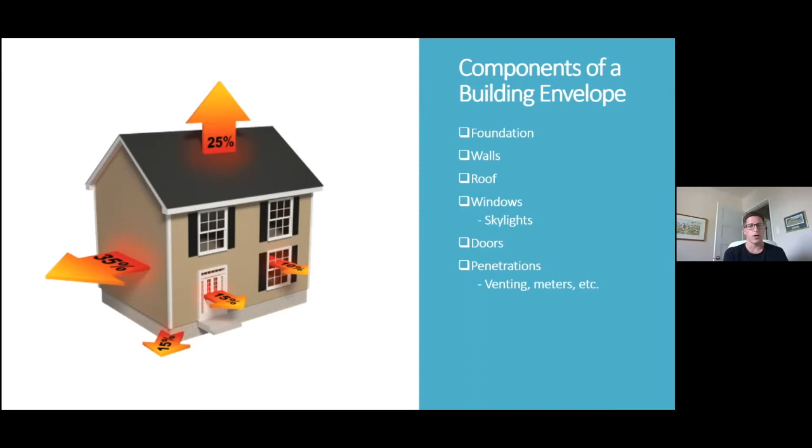This is simply put, but for the most part, envelopes fail for one or a combination of four reasons. The first would be design deficiencies. Like I was saying, if you design the wrong type of wall assembly for your climate, that's going to be a really quick way to see failure. So in Edmonton, if my wall is not designed with enough insulation, my envelope is just not going to be adequate, so it will fail.

Material failure. You can get failing material. You can get shingles that shouldn't have made their way off the line. You can get poor cladding. More often you'll see material failure with windows and whatnot. So that's a possibility. Poor workmanship. So things not being installed properly. You can buy the nicest window in the world, but if you just slap it in, the gaps aren't sealed and it's not a flush install, that window will basically operate just like a poor window.

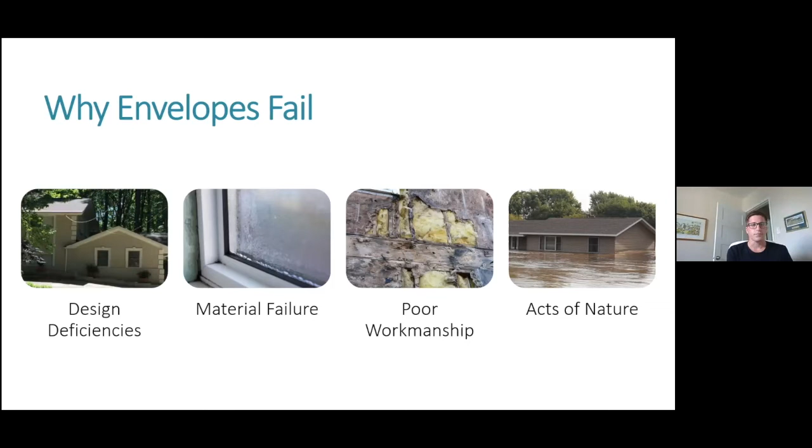Okay, getting into the individual components of a home. Starting at the bottom of the building is the foundation. The foundation is the load bearing part of the building, which is either below or sitting on the ground level. There are three major types of foundation found in residential homes: basement, slab on grade, and crawl space. Each has its pros and cons. So I'll briefly touch on each of them and what some of their features are.

With the basement foundation, I don't think I need to really go into what that is, but obviously an underground place to live and play, 6 to 10 feet deep depending on soil conditions, typically provides the most load bearing.

Excuse me, just want to make sure that I'm, okay, yeah.

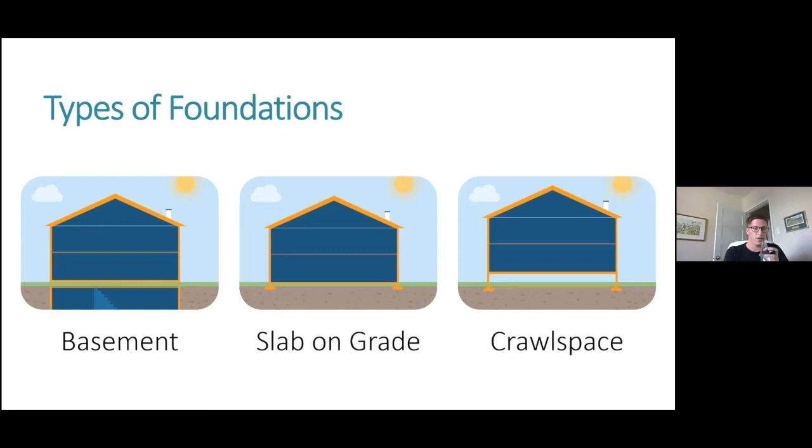Okay, so in terms of foundation failures and fixes, I'll just breeze through this. Typical failures we find: flooding, mold, housing collapse in the worst scenarios, cold basement floors, and air leakage. So those are some of the most common failures with various degrees of severity. And simply put, there are some fixes that we can consider in our housing group. So adding gutter extensions, plugging gaps, restoring crown, reshaping landscaping. So that's a pretty simple one.

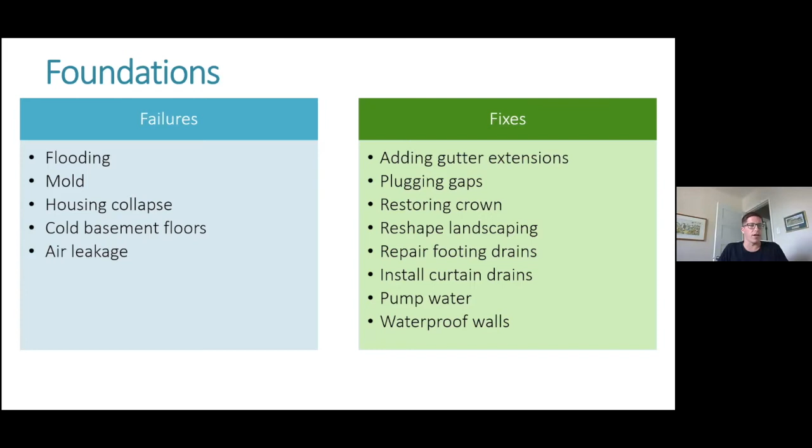Often you'll see people having their eaves troughs towards the ground, and then the ground is really close to a window or their foundation. So just trying to avoid those little things to make sure that, as your house is filtering out rain, it's going away from the home and then maybe going down in a down slope. So gravity will work its way away from the home, as long as your neighbors aren't too close to you, obviously. And then, installing curtain drains, pumping water away from areas, and then installing waterproof walls are some simple fixes.

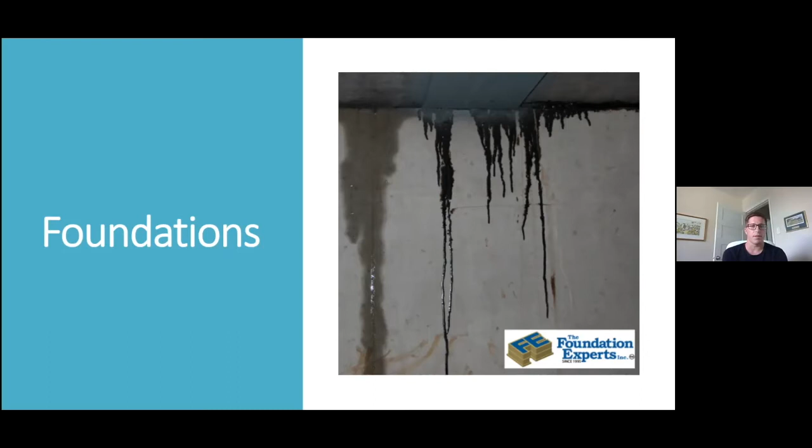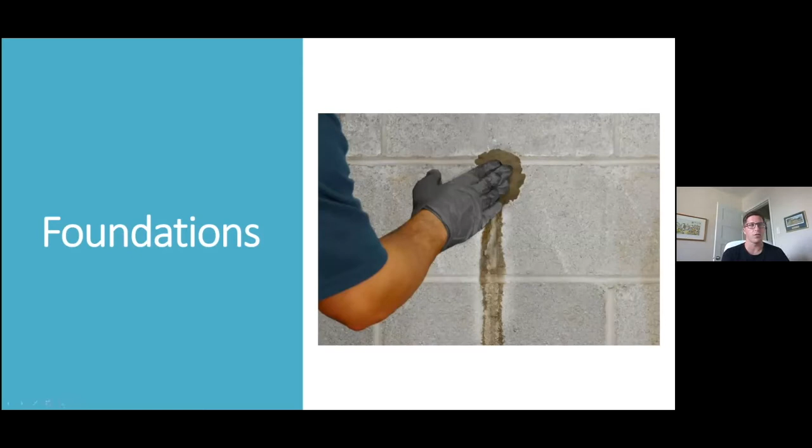And then, there may be quick fixes that you can do as a housing manager, as a maintenance individual, but you may sometimes have to pay a professional. So just something to keep in mind here. That's just a little image. And then this is an installer fixing a crack in the foundation with some hydraulic cement. So this is a simple fix to a leak in the foundation. It's not going to necessarily repair the building entirely, but you can make little patches like that and help out quite a bit and go a long way.

So in terms of waterproofing basements and crawl spaces, this is just quick do's and don'ts. You're going to want to find the source of moisture. So that's a do. Fill cracks in the foundation with hydraulic cement. That's not necessarily what you always want to do, but it is something you can do. Seal interior walls with high quality waterproof paint. If you're doing this, you have to make sure you don't do that over the existing paint. It does have to be reapplied. And ensure all eaves troughs are pointed away from the basement.

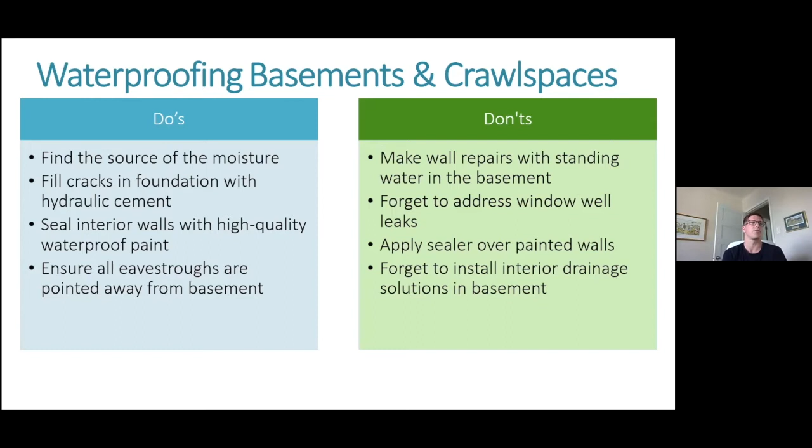Don't make wall repairs with standing water in the basement. That's a hazard and is a recipe for disaster. Don't forget to address window wells. Bless you. Apply a sealer over painted walls, and don't forget to install interior drainage solutions in your basement if possible. And that's a good idea to do if you deal with flooding for your new homes and you're building basements, to potentially invest in additional interior drainage solutions.

Okay, so moving on to walls. Walls are a perfect example of a building system that really tends to vary from region to region. As I said, I'm located in Edmonton, which is very cold and dry. So here our buildings prioritize reducing thermal bridging, which is essentially when the assembly of your walls or ceiling allows heat transfer to go through certain areas.

So in a 2x4 assembly house, all those pieces of wood essentially are going to be thermal bridges. So we want our wall to have more continuity and less ways for heat to escape. That's the main focus here in Edmonton, lessening that heat transfer.

In coastal BC, I'm seeing that the assemblies are more focused on allowing moisture to be managed effectively. So certain assemblies like a rain screen assembly, as I've mentioned, are the more progressive new way of doing it that I've seen. It is a way of making sure that we contextualize the wall assembly. There are many ways to build a wall. Some examples: rain screen assembly, split insulation, exterior insulation, double stud with service wall. There's countless, and people are constantly coming up with new ones, and old ways are getting discontinued.

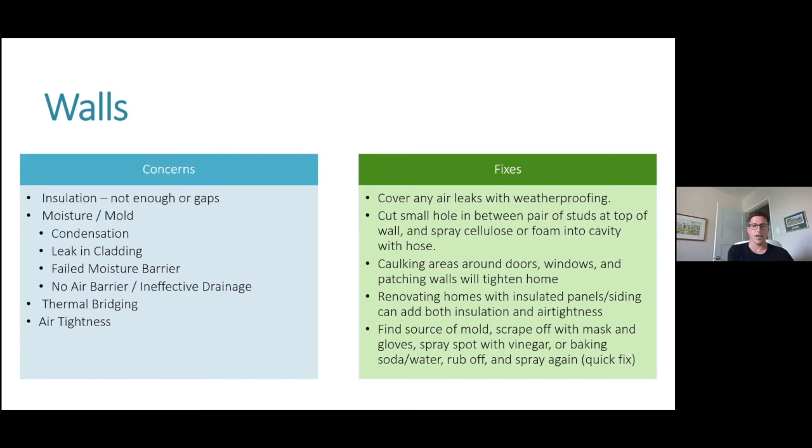And then furthermore, it's going to create a more functional home. We've all lived in homes that have drafty windows and drafty walls, and it's just not as comfortable as one that has a solid performing wall where you can hang out and watch TV or something, and you don't have to put a blanket on if you don't want. So this just shows sort of the performance of these walls.

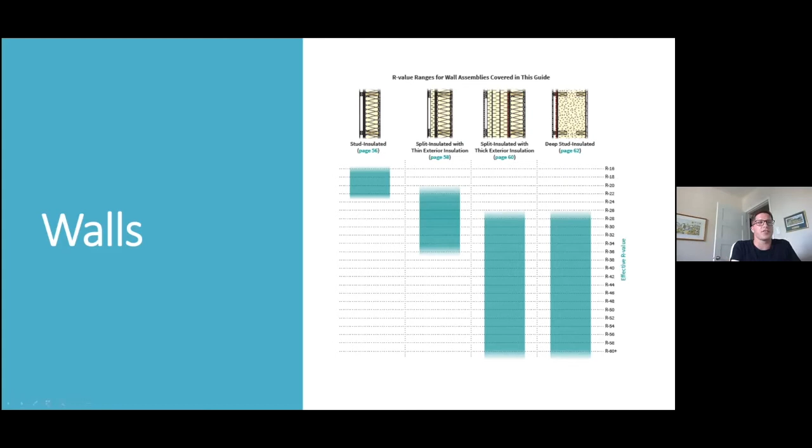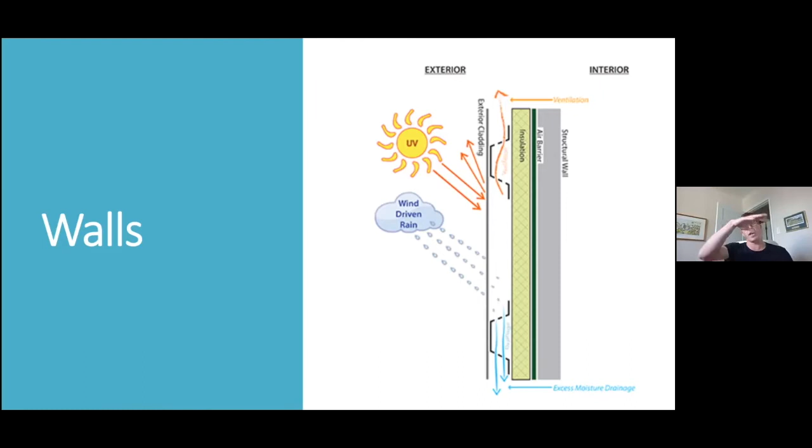So instead of trying to keep the moisture out, they actually say, come on in, moisture, we're going to let you in, and then we're going to divert you where we want you. So it's kind of like admitting that for the most part, we haven't been successful at just keeping moisture out. If we push it right up against the wall, it's very hard. It finds its way in. Rain and moisture are really tricky, and they're persistent, so they find their way.

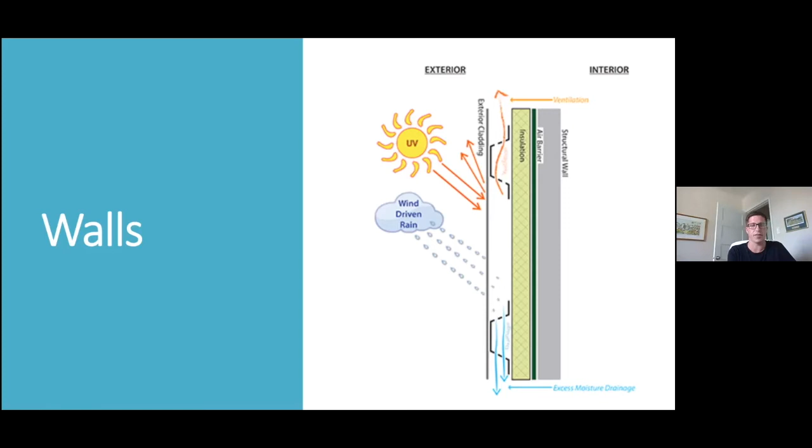So the rain screen wall invites it in and allows a place for it to drain effectively, and then you're dealing with just making sure that it's drained into a proper area, and for the most part you're going to steer clear of moisture if installed correctly.

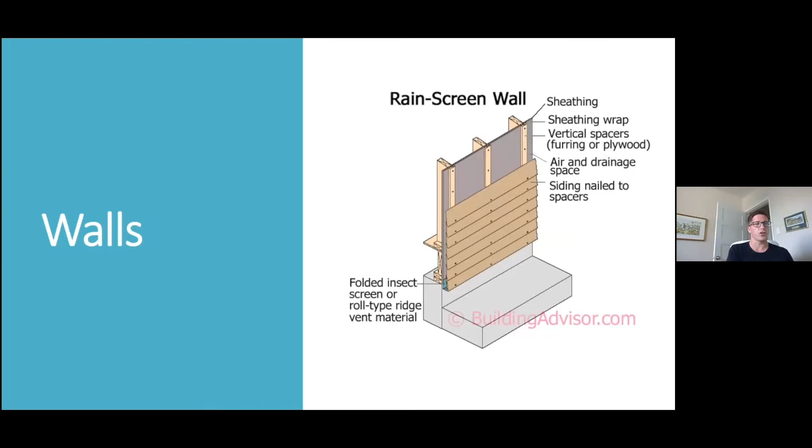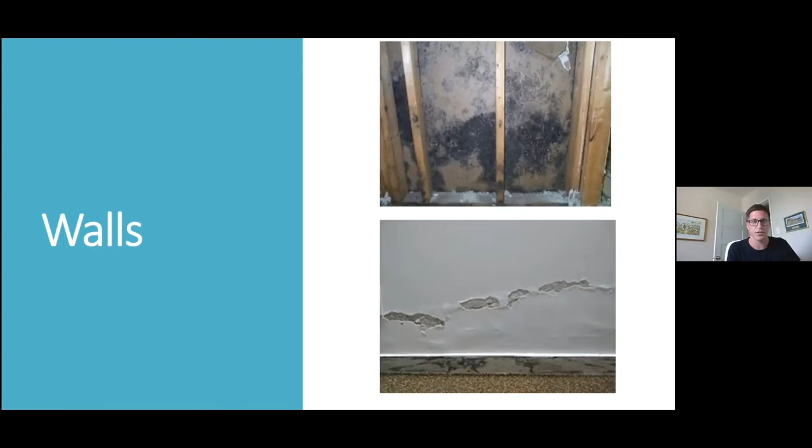Okay, thank you for that. Okay, 10 minutes left in this section, so I'm going to quickly zip through this. I've got to kind of cruise through the next couple slides to catch up to my timeline here. So I won't go too much into this. We will be sharing this.

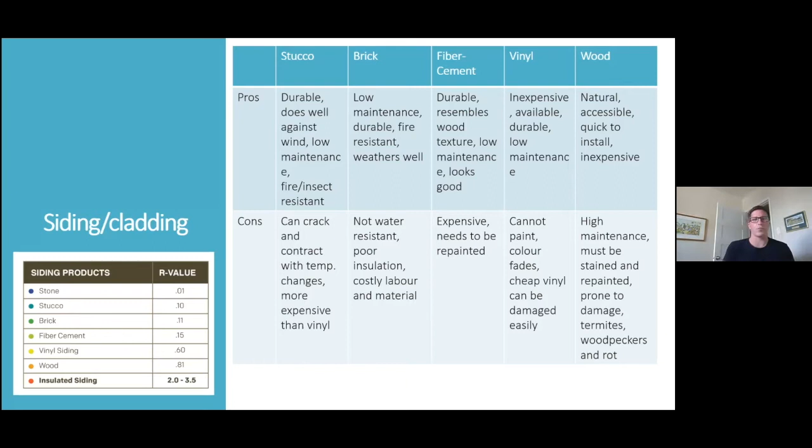Roofs are very variable, but it's important to consider that the main goal of the roof is to stand up to water, snow, wind, heat, and cooling. So whatever element you face the most is the one that you're going to want to look after and focus on. I don't know if anyone's from a really snowy area, or if you've been to the mountains and seen the new way that they're designing homes to make sure that the snow loads are properly managed.

But there are just techniques that are very specific, and I'm sure in areas that are incredibly rainy, there's new techniques to properly drain that. So considerations there: roof material, the roof pitch, the overhangs, and then the fenestrations and vents.

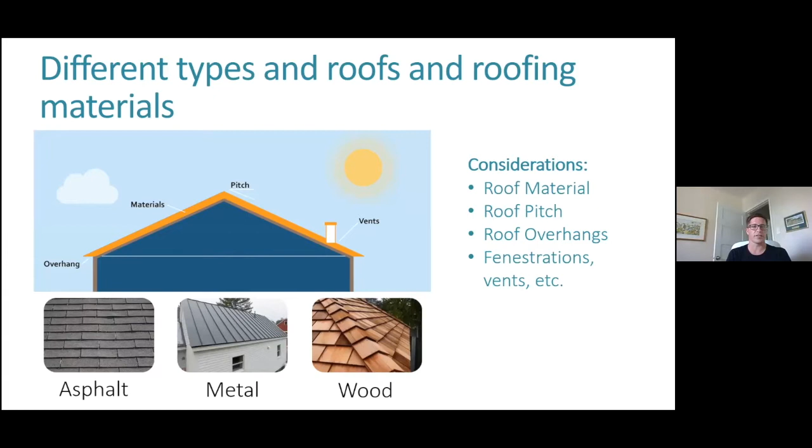Roof overhangs can be very valuable in keeping out light during the summer when the sun is at its highest point. So designing an overhang in a way that, and this is something you'll see in more iterative design processes like the passive house and whatnot, where the overhang is designed to prevent the sun from coming into the house in the summer to avoid having to create a cooling load, but it's not at such an angle that the sun won't get in the winter where it's at a lower angle of incidence. So just a way to design your home that's pretty energy efficient and allows for the benefits of the sun and not the negatives.

In terms of roofing failures and fixes, I'll just breeze through this. We got roofing leaks, flashing blowouts, poor installation, lack of maintenance, ponding water on the roof, punctures in a roof, and then improper repairs. Fixes, you have proper maintenance on the roof. So that's a pretty key one that I think some people take for granted, but clearing off debris once a year, maybe twice a year, clearing gutters, examining for damage, because you'll probably see the damage before it actually finds its way to a ceiling.

And then understanding your roof type so you can get the right material for a fix, self-adhering roof tape, extra shingles for repair. High quality duct tape is even good for quick and temporary repairs. Polyurethane caulk and sealant, and then roof seal patch to patch leaks.

So that's what I was doing on my roof the other day, is I have a little solar tube that allows sun into one of my bathrooms that has no window, and it was leaking. So I had to go up and apply a bunch of this stuff around it, and it worked so far. But it hasn't rained yet, so I don't actually know if it's worked. But either way, this is what I was doing on my roof. It's not a great fix. I probably have to re-roof my roof next year, but it's going to do the job for a temporary fix, and it's going to prevent mold in my ceiling.

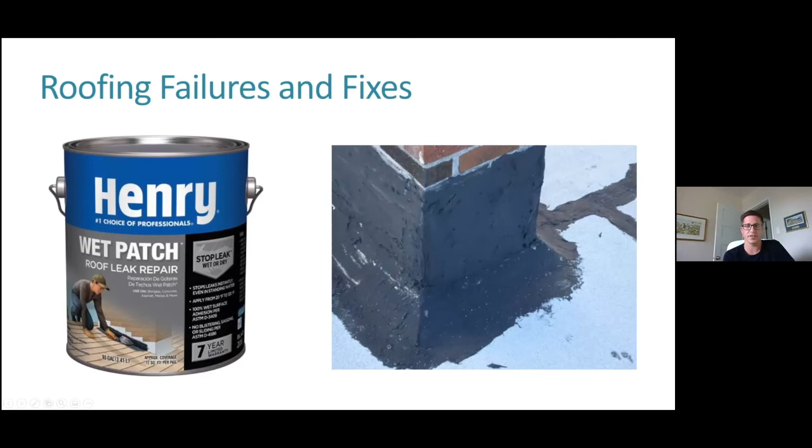So quickly going into windows. Main thing to consider here is the window quality, the quality of the installation, the condition of the window, the performance of the window, and the operation of the window. So those are the main things that influence window performance, I guess.

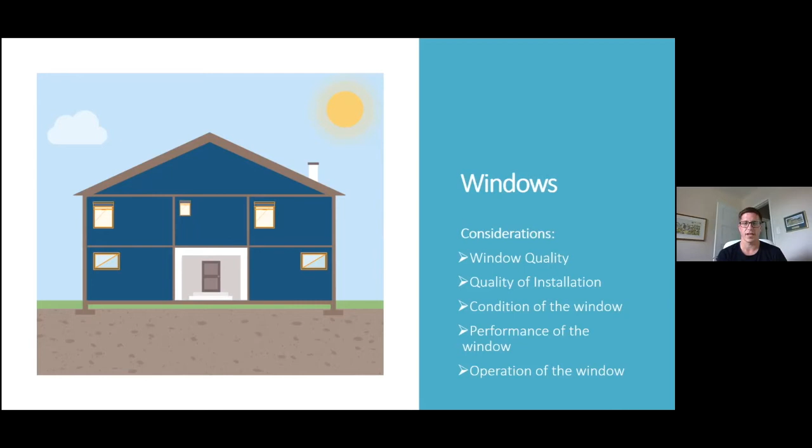So in terms of window quality, we've got single, double, triple, even quadruple pane. I saw one at a conference that had 10 layers. So each of these layers does add insulating value to the home and will make your building more energy efficient for the most part. The best windows, for the most part, have an argon or krypton fill. There are some new techniques that are being used though.

And then the quality of the frame and the seal is one of the most overlooked things, but it's really critical. So insulated framing and non-conductive framing. As you can see by this picture, there's more than just the glass in a window, is sort of the take home here. And make sure that when you are negotiating window installs, or if you are commissioning them in your community, that you are making sure that it's going all the way, have a quality frame. You're going to have to open it up, and sometimes it's not going to be flush.

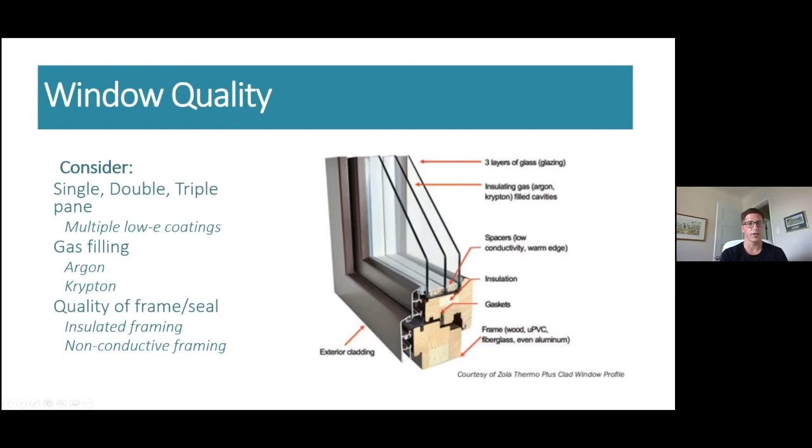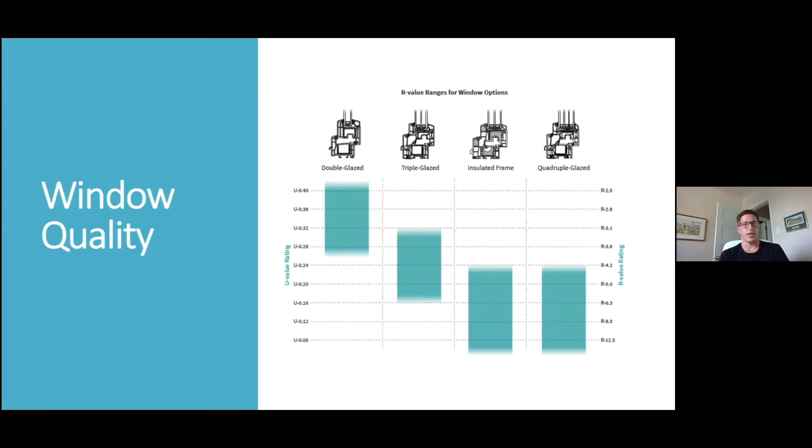So you're going to have to do some additional carpentry work. So making sure that these are installed properly is really critical. Just another diagram to show the insulating value of these windows. So it does have a huge effect. The R value is almost quadrupled as you go from a double glaze to a quadruple glaze. So pretty impactful.

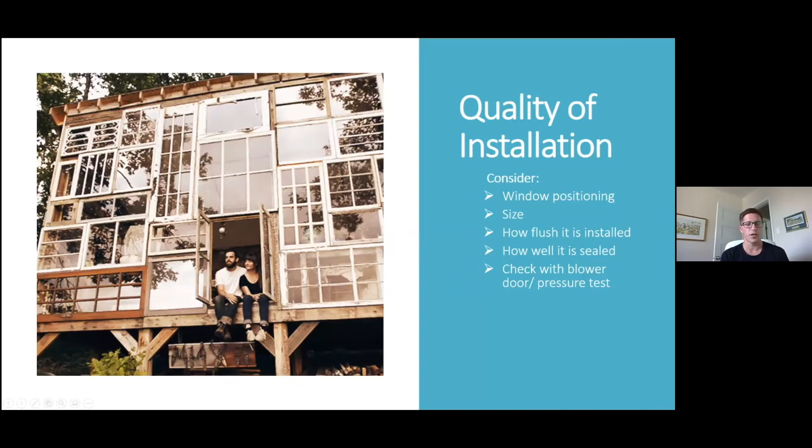And then the quality of the installation. Main thing you're going to want to consider is the window positioning, the size, how flush is it installed. So I've talked a little bit about that, but probably can't go into much detail. How well it's sealed, and then you can check all of this with a blower door test, which I can get into a bit later, on what that looks like. But that's part of the EnerGuide assessment.

In terms of windows, poor fit, warped frame, leaks in the center, leaks in the corner, winter frost, dirt and debris in the sill, loose and missing seals or gaskets, improper repairs, and often they're just past their lifetime are some of the failures.

And then there are lots of fixes. So you can use curtains. You don't want to go too far with that because that can create some mold problems, but it can be a temporary way to keep out certain heating elements. Shutters, seal and caulk and weather stripping is a really quick and easy fix a lot of the time.

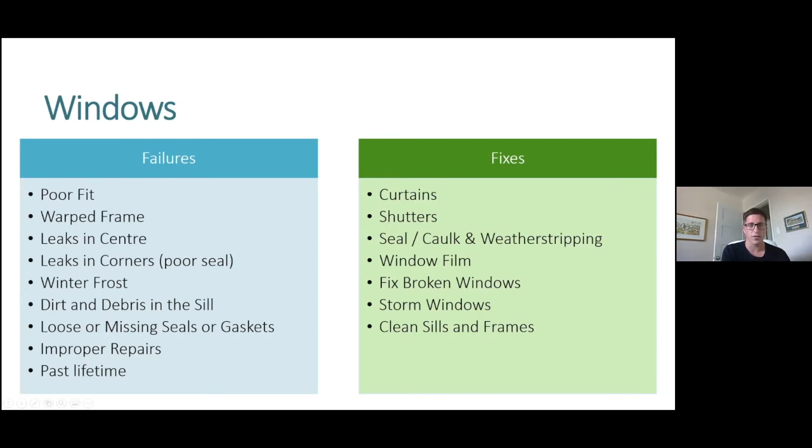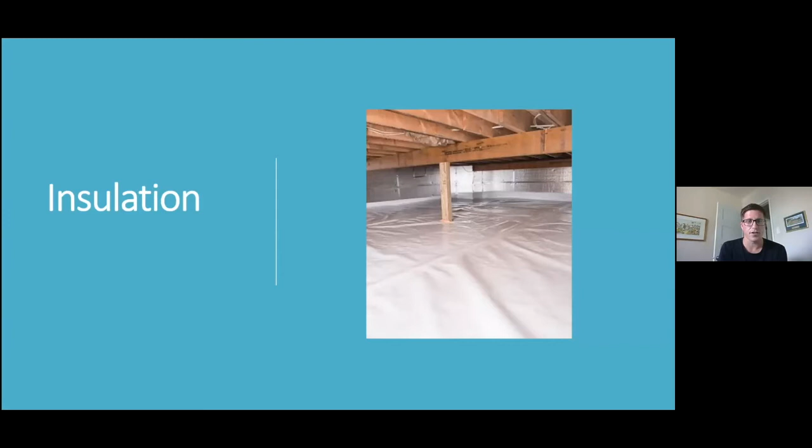The main thing is adding insulation and ensuring air tightness in the building envelope helps maximize the performance of the wall assembly. So you can design a wall perfectly, but if you don't apply the insulation correctly or you don't have the right insulation, it's not going to perform the way it should.

Adding insulation to walls after they're drywalled is very challenging and expensive. So to avoid these costs, you're going to want to ensure that the building is well insulated to at least R22. That's like the bare minimum, but for some regions way higher. So you're going to want to make sure you do that up front because that's not a cost that you can easily renegotiate in the future.

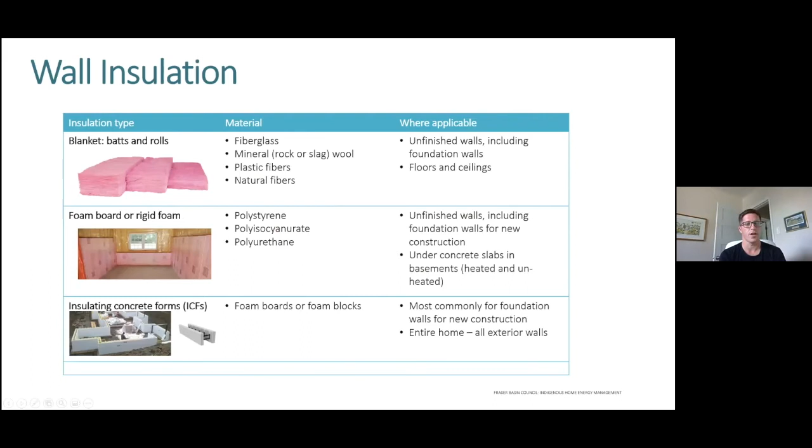Won't go into too much detail, but I think these slides are going to get shared. So these are just, once again, where these different insulation types may be most applicable and what the materials are. So we've got batt insulation, foam, insulating concrete forms, loose fill and blown-in, and spray foam and foamed in place. So once again, they all have their pros and cons and their cost implications.

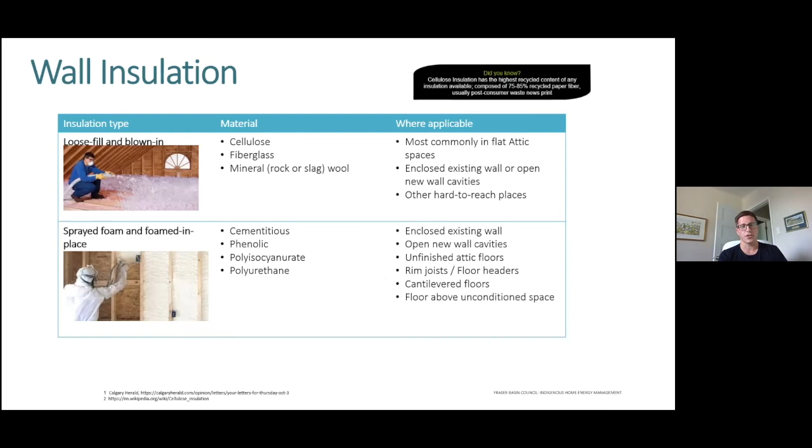But for the most part, it is a worthy investment to spend money up front on insulation. The cost increase is very small relative to the impact on the overall performance of the home and the energy efficiency of the home.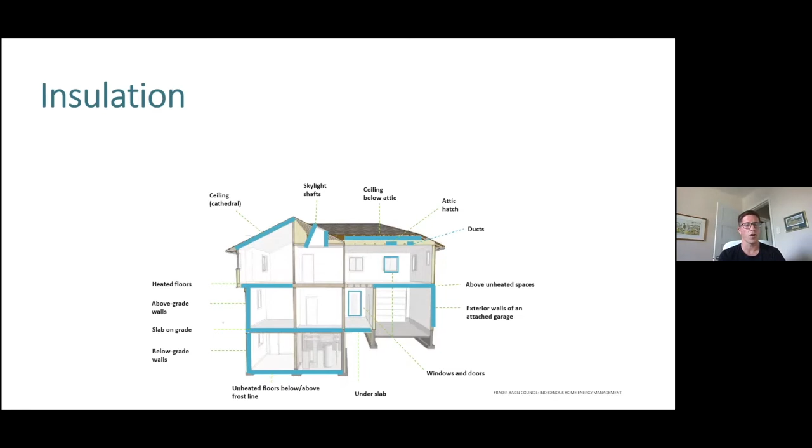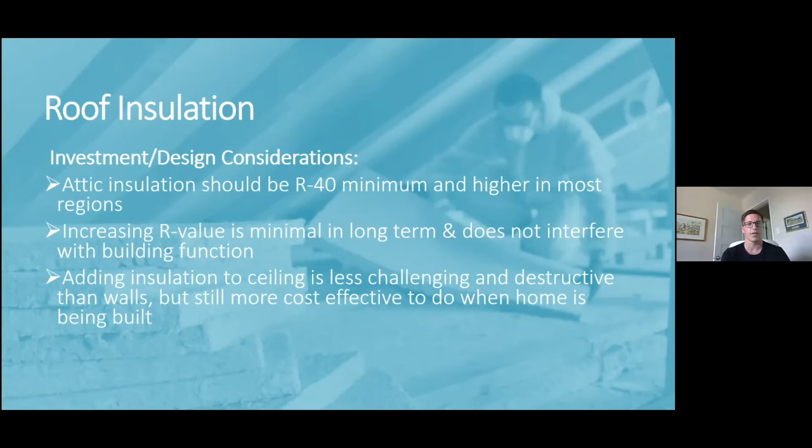Roof insulation, attic insulation should be R40 minimum, higher in most regions. This is an area that you can add to typically in a more cost-effective way than the walls, but I would still always suggest investing up front. And it doesn't really negatively affect the building's function for the most part if you do that.

And then I guess this is last but not least, wall penetration. So this is sort of not a system in itself, but as you can see, there are things coming in and out of the building envelope all the time. So dryer vents, faucets, air conditioner, duct registers, all over the place.

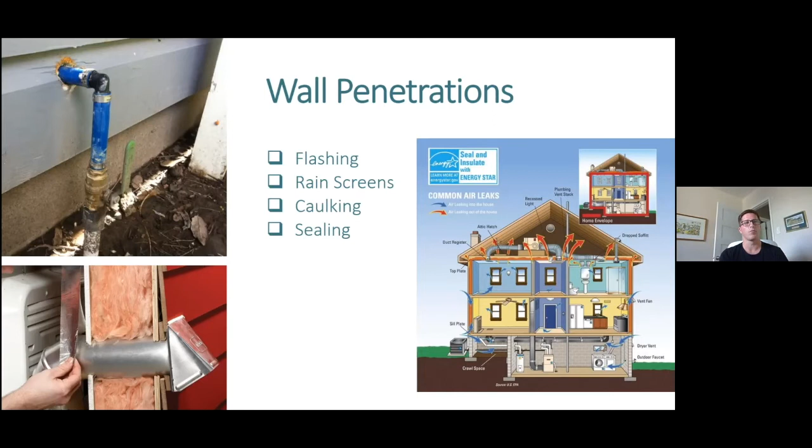So these are often overlooked areas with respect to insulation and focus. So it's just something to consider if you design the home, and sometimes these things go in after the fact. You need to address the leaks. You need to make sure they're sealed during installation. You'll sometimes see vents funneling cold air in and allowing moisture into the home.

So you can caulk and seal air leaks where plumbing, ducting, or electrical wires come through the walls. Install foam gaskets behind outlets and switch plates on the walls. Cover your kitchen exhaust fan to stop air leaks when it's not in use. Install rain screens in damp areas, and then check your dryer vent to be sure it's not blocked.

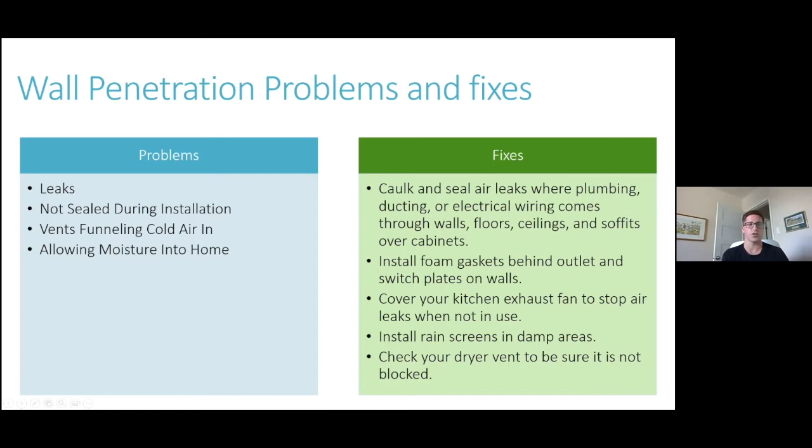Okay, and then just to wrap up, this is a diagram to finish up the regional thing. This shows the different requirements from region to region. So maybe just take a second here, find your zone, take a look at the requirements that you have for R value, and then compare that to the furthest off zone. You can see how different the requirements are from region to region.

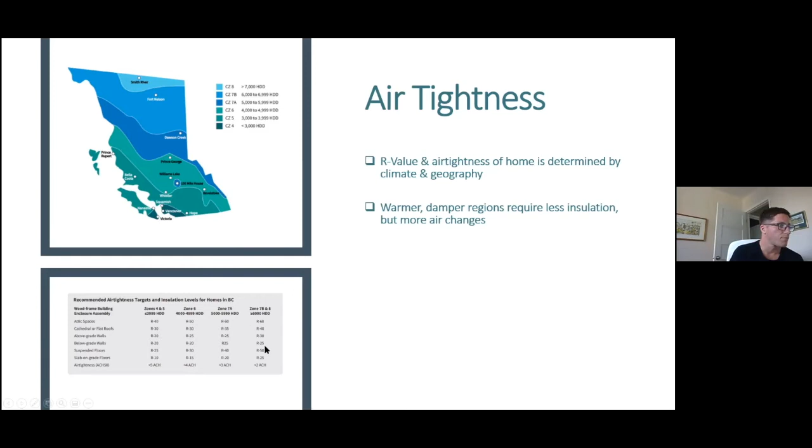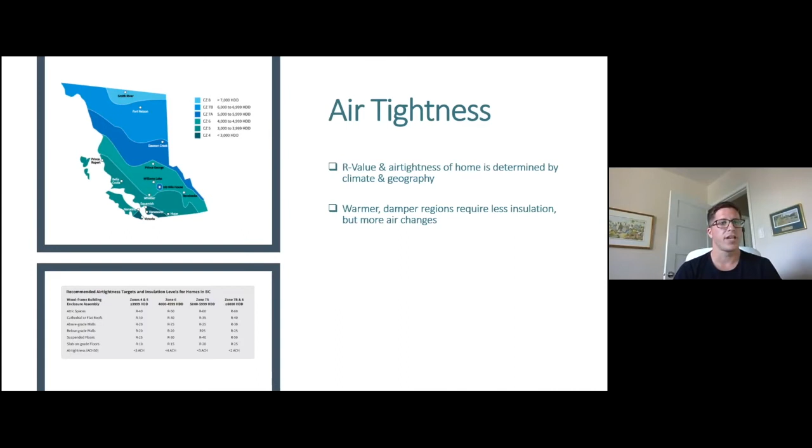If I look at zone 8 to zone 4, for a suspended floor, the R value is double. So if someone says all homes need to be R22, take it with a grain of salt, I guess. So, okay, on to the Q&A.

Tom, do you have some questions here? Yeah, thanks very much, Adam. We just wanted to open up to you guys, really. It might be that you have some questions for Adam, but also what would be really useful is, from some of the more experienced guys, if there's some examples you can share. We've seen here that there's a lot of battling with elements and a lot of adapting that needs to be done depending on the climate zone.

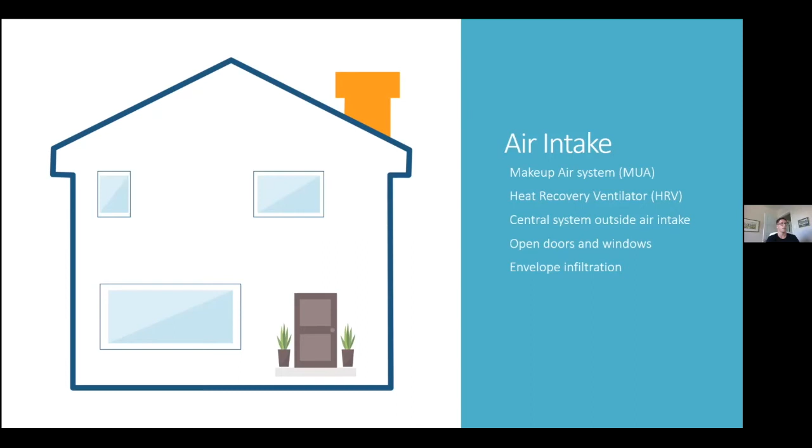And air can get into your building through envelope infiltration, through open doors and windows, a central heating system that actually intentionally draws in fresh air, a heat recovery ventilator system, or a makeup air system, and a few other means and other system types. So heat recovery ventilation. Heat recovery ventilators, also sometimes called ERVs or HRVs, are becoming pretty popular. The device is simply a supply air fan and an exhaust fan in a box, where two air streams can transfer heat between each other.

So essentially, the fresh outdoor air is preheated by the exhaust air, and I'll go more into it. I have a chart next slide, but they are great systems for energy efficient fresh air. It utilizes stale warm air and cool fresh air, and basically converts them into cold stale air that you send outside, and warm fresh air that you keep inside. So it takes the good and sends out the bad, essentially. It requires ducting, generally in the walls, so that can be costly. It can be integrated with bathroom fans and exhaust fans sometimes.

They are not cheap to retrofit into an older home, and it does require attentiveness to the elements, so some freeze and frost protection, and depending where you are, you're going to want to make sure that the home is equipped for it and that the climate is equipped for it. And certain climates, like I said, will require additional protections. It's important to install with controls to increase or decrease fan speed and adjust the amount of mixing. Like in the summer, you may not want heat recovery.

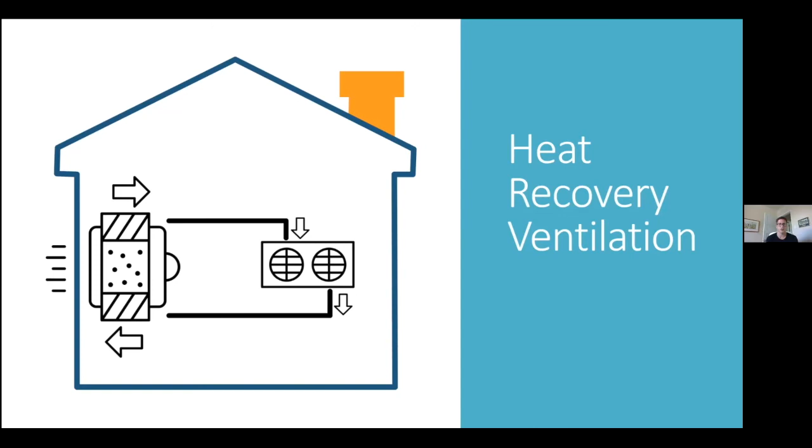So here's how simply an HRV really works. So like I said, you have the warm, stale air, say from your kitchen or your bathroom. You want to keep the heat, but you want to lose the stale. So then you've got fresh, cold air coming from the outside, and it's drawn in. And then essentially you dispel the stale, cool air, and you keep the fresh, heated air. So it's a pretty cool system.

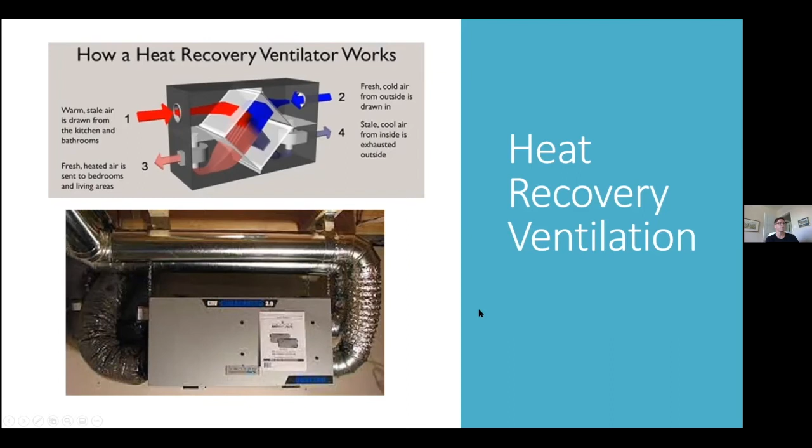This is how it looks installed, a pretty clean install here. And yeah, they're pretty solid systems in certain climates. And just another simple little display of how an HRV works. This is more like practically where it might be located, and how it is actually ventilating your building, where it would be dispelling certain air, and where it would be drawing in fresh air.

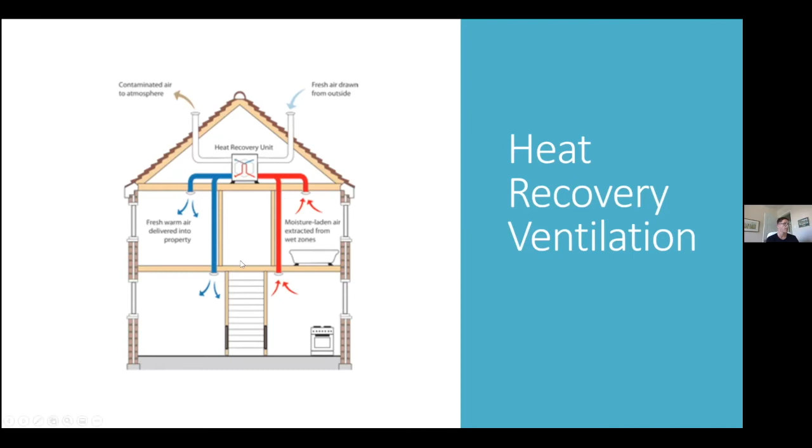So there are different housing types and different ways that you can configure this, but this is a pretty neat diagram just showing, here's the washroom, kitchen, pick up that air, and then let's deliver fresh air to the other rooms.

Air cleaners and air purifiers can also be installed to improve indoor air quality. They do this by sucking air past a filter, which captures major pollutants. And there aren't a ton of major downsides that I'm aware of. Some people may have other opinions on that, other than just the cost of installing and purchasing them.

So you can get mechanical or electrical air filters, and they can be installed in a forced air furnace, heat pump air intake, in-duct or portable versions. And they remove particles in the air. So a HEPA filter would be an example. And then there's different types and different levels of filter. An activated carbon filter removes gaseous pollutants.

Apparently you should avoid ozone air cleaners because they can cause O3 related air quality issues, and they need to be sized to the home and to the area of the home effectively. They're also quite good if you have a home or a climate that's prone to dust, odor and particulate circulation. I know some people probably deal with that more than others.

And then here are just some pictures. You've got some plug-in air purifiers there, and then you've got just a furnace filter here. Just on the furnace filter, if you do have a furnace or anything that has a filter, even your car, it is important to clean it out for the general health and performance of the system. I know we could all do a bit better job of that, myself included.

Setting reminders to make sure you stay on this is something that I've done. I just put it in my calendar to say, go check the furnace filter. I have a removable one, so I have to vacuum it and clean it and wipe it down. But some people have these replaceable ones, so just grabbing 10 from a hardware store, having them ready, makes it easy.

And if you're a housing manager or in charge of a large housing stock, it may be worth considering buying some in bulk. And if you're finding that people don't maintain their systems properly, either get hands-on and do it yourself, or, like I said before, try to run some sort of educational campaign that helps people understand the benefits of properly managing the ventilation aspects of their home.

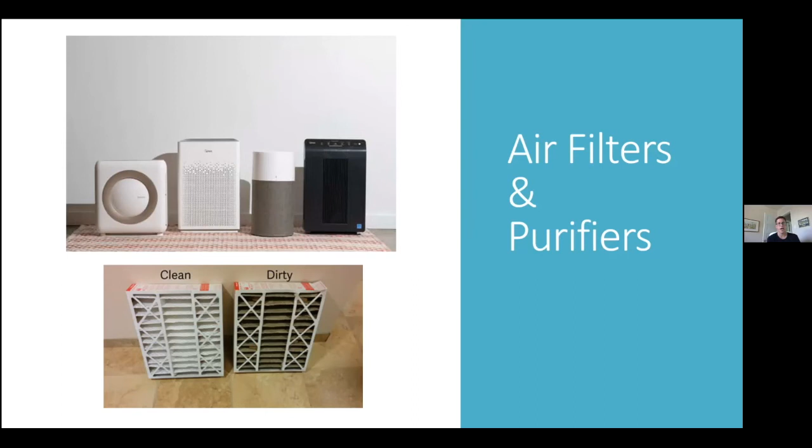On to dehumidifiers. Pretty simple here. Dehumidifiers are for areas that have too much humidity; they take the moisture out of the air and produce air better suited for the indoor environment. They go in areas where the moisture cannot escape or has a harder time escaping, such as a basement, bathroom, or crawl space. They are typically for warm and moist climates.

For example, I don't think I've seen too many dehumidifiers in houses like mine. Most people have humidifiers. So in certain climates, it's unnecessary. They are generally kind of band-aids for other home system issues, whether that be a badly performing foundation or envelope, or poor ventilation. But like I said, it is a band-aid, so it does have some value. This will address humidity issues by reducing the humidity.

In some climates, you may have the opposite problem and want to add moisture, in which case you'd go for the humidifier rather than the dehumidifier. And just keep in mind, the goals for humidity levels are about 50% in the summer and 30% in the winter. That will make sure you have a healthy environment, for the most part, that doesn't produce mold.

And yeah, depending where you live in the country or the province, you may be in the market for a dehumidifier or humidifier, and humidifiers you can get both aftermarket or integrated into the system. So it may be a good idea if you have persistent damp issues that can't otherwise be addressed to look at a dehumidifier. But for the most part, you do want to look at the more fundamental issues in the home.

Okay, some moisture and maintenance best practices. So, pretty long list here, but obviously you're going to want to check for damp spots and do your best to fix leaks. That's pretty critical. Air sealing your home is a good start. Using kitchen fans when cooking. Run bathroom fans when showering and bathing, and I would add before and after.

So activating the fan is a good idea, get the flow going, so when you actually start having steam, it's going. You know how fans take some time to start up, and then leaving it on. So when you take that steamy shower and you come out, you don't just turn it off. So that's a key one. Ensure your clothes dryer, stove, kitchen, and bathroom fans are vented outside. Caulk around tubs and sinks.

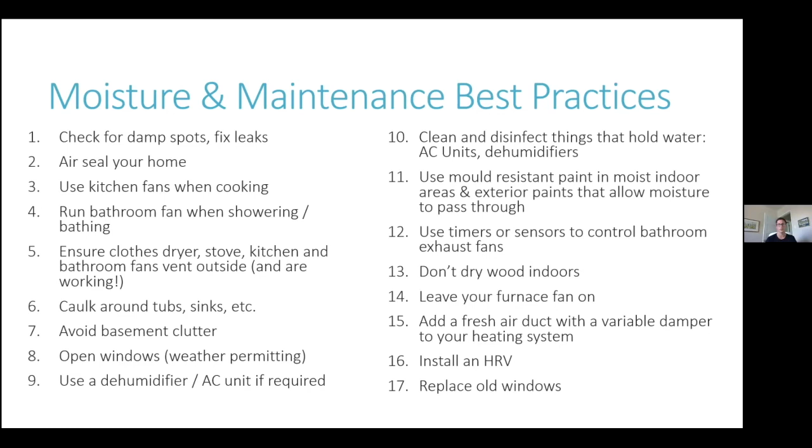Okay, so indoor air quality is typically measured in parts per million, which is a measure of the density or the amount of contaminants in the air. The amount that would be considered dangerous is dependent on the contaminant. So an example of poor air quality is the association of headaches and poor air quality. People who experience poor air quality are more prone to headaches, and that's because of the parts per million within the air that they're experiencing.

So human headaches and drowsiness are often reported when exposed to 2,000 parts per million of CO2 for more than 5 minutes. And outdoor air is typically around 450 parts per million. So it gives you an idea of how important it is to make sure that you are getting that fresh air in there, because CO2 will build up, and it can create larger problems, but at a bare minimum, you'll just feel worse. You'll feel tired, groggy, and have a headache.

So major concerns with indoor air quality are of course biological contaminants, so mold, insects, mites, cockroaches, dust, pollen; combustion byproducts, so gas and small particles caused by the incomplete burning of fuels such as oil, gas, kerosene, wood, coal, and propane, carbon monoxide, nitrogen dioxide, carbon dioxide; and then formaldehyde and other volatile organic compounds, which are found in materials such as plywood and particle board, in furnishings, drapes, carpets, and so on.

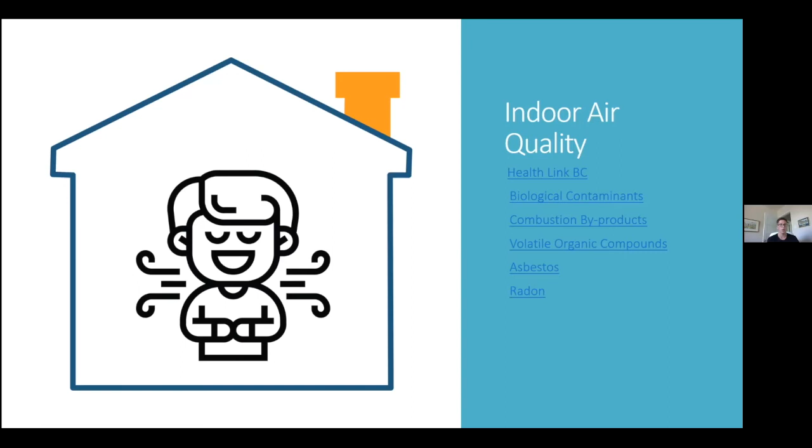Fresh versus recirculated air, just something to keep in mind. In any given home, the ventilation system is pushing around both fresh air and recirculated air. In most ventilation data and standards, you may hear me say CFM, which is cubic feet per minute. You'll also hear air changes per hour, which is a metric used to describe 100% of the air replaced in a building or a room with fresh air.

Generally in BC, I believe 3 to 6 air changes per hour is recommended, so that's something the home should be designed to have. Just something to note: large commercial buildings require ventilation by code, and typically recirculate about 80% of the air and then have 20% fresh air. In residential homes, ventilation is not strictly required by code except in certain cases. Getting fresh air is very important for their dense population, where CO2 can build up in the space.

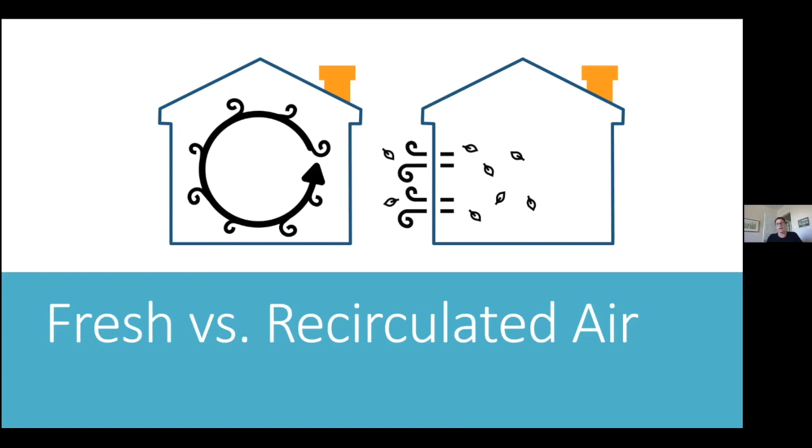So not as critical in homes, but an example would be a big theater or a university classroom, where you slam a couple hundred people into a room. If there's not proper ventilation in those rooms, it can actually become quite dangerous quite quickly, and it can affect people negatively.

Oh, excuse me, sorry, I scrolled by accident there.

So centralized ventilation. As you can see here, there is an example of an exhaust ventilation. Exhaust ventilation systems are most appropriate in very cold climates. In climates with warm, humid summers, depressurization can draw moist air into building wall cavities where it may condense and cause moisture damage. So this may not work in all climates, and there are different types of ventilation systems based on your climate. Ventilation systems are going to vary from climate to climate.

Exhaust ventilation systems are relatively simple and inexpensive to install. Typically an exhaust ventilation system has a single fan connected to a centrally located single exhaust point in the house. A better design is to connect the fans to ducts from several rooms, preferably rooms where pollutants are generated, such as bathrooms. Adjustable passive vents through the windows or walls can be installed in other rooms to introduce fresh air rather than relying on leaks in the building envelope.

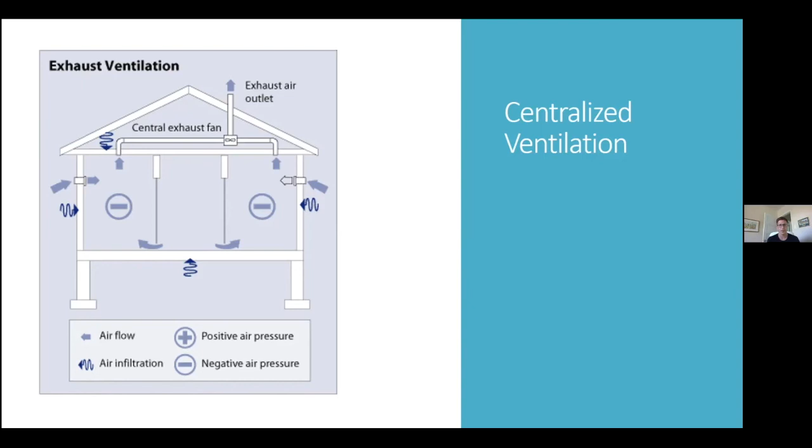Another item we have to manage, similar to air quality, is moisture. There are two main sources: water vapor and airborne moisture, and then leaks and spills. We want to keep humidity under 50% to ensure there's no mold growth. Too much moisture leads to mold and mildew, which can increase allergies and lung problems. It can create nasty stains on your windowsills and walls, and cause interior paint to blister and peel. It's altogether bad for business to have mold running through your home.

Condensation can also lead to rot and structural decay. So altogether, just keep in mind these numbers. I would make a habit of trying to monitor them in homes, because it is going to be a really good indicator of whether it's a fertile breeding ground for mold.

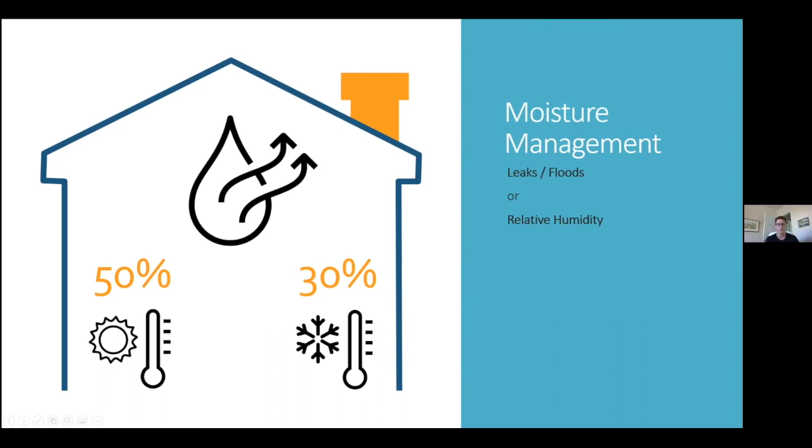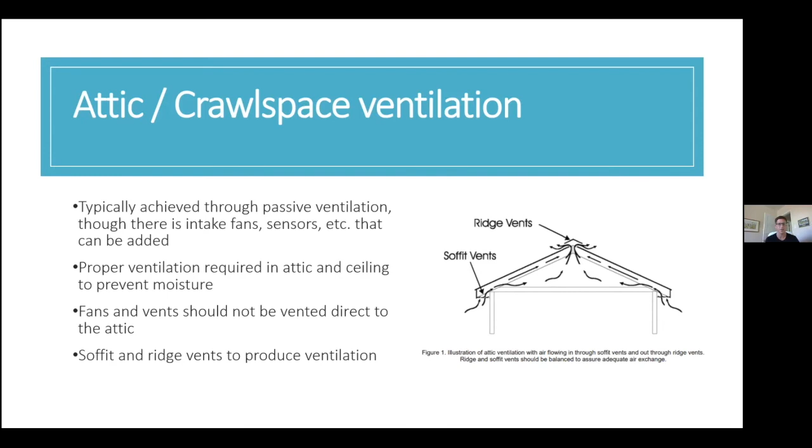Okay. So we did talk on this, attic and crawl space ventilation. So this is key to prevent moisture. Won't go too much into this, but there are ways to actively and passively ventilate your attic. So as we talked about earlier, we add insulation, and you do have to make sure that this area is ventilated. And here's just a quick diagram of a functioning attic versus a dysfunctional attic.

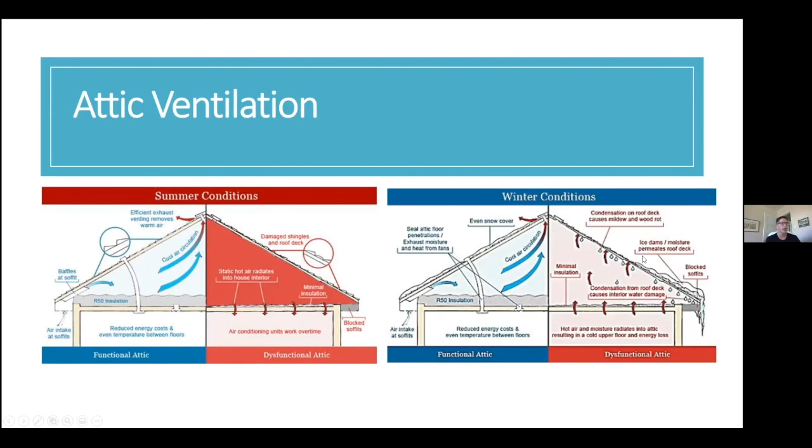So you can see that there's different levels of insulation. In the dysfunctional attic, you're seeing, you know, lots of moisture, condensation from the roof, and whatnot. So these will be shared, but good little diagram.

So heating systems. As Tom mentioned, I'm a little behind time here. So these are generally the heating fuels: fossil fuels, renewable energy, and heat exchange. So fossil fuels, natural resources, you burn gas, you're generally burning things to create power. Renewables, you're utilizing technology to harness nature, so wind, solar, water, things like that.

And then obviously you've got heat exchange, which uses electricity to move heat around, but doesn't actually create the heat. So geo-exchange, solar thermal, geothermal, air source heat pumps. Main thing to just consider here is the availability of these resources, the cost of them, the reliability. So for the most part, they are all reliable if designed properly and sized properly, and the air quality and GHG emissions associated with them.

So as we all know, renewables are clean, more environmentally friendly, but there are some cost concerns with them, some reliability concerns with relying purely on them, whereas there's some environmental concerns with fossil fuels, and as well, there's some concerns with fossil fuels in some remote locations in terms of access. So shipping in fuel oil, diesel, propane, those are all problems that we do encounter.

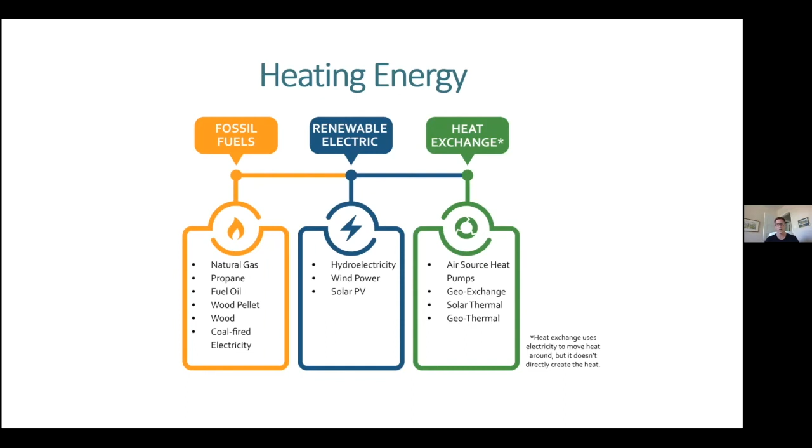So moving on, heating systems. So central heating systems utilize a single heating system to heat the entire home. So examples of this are central furnaces, boilers, and heat pumps. Direct heat examples, those are more spot heating. That would be gas-fired space heaters, unvented gas-fired heaters, electric space heaters, wood burning pellet stoves, and fireplaces.

For central heating, this is essentially just showing some different types here. Effectively, you've got warm air furnace, hot water boiler, and heat pumps. So warm air furnaces, I think we for the most part know how they operate. Typically a fan works in combination with the furnace to blow warm air through the registers and grills of the house. Just for time's sake, I do have some more notes as to how it actually operates, but I don't think it provides a ton of value right now.

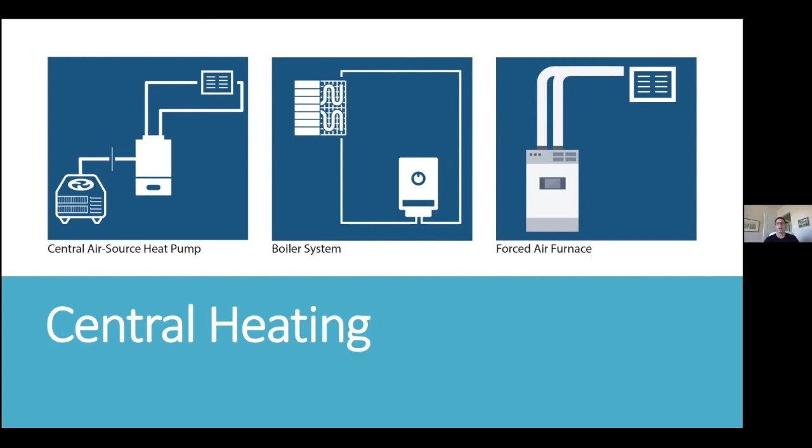And then hot water boiler, boilers are used to heat hot water that is sent to the terminal units, so in-floor radiators or baseboard radiators that then dispel heat. And then a heat pump works the same way as a furnace, except a heat pump is doing the heating instead of the furnace. And it also typically provides cooling. We'll just continue on here.

Direct heating. Here are some examples. You've got the electric baseboard, which turns electricity into heat via the resistance of an element in them. Ductless heat pumps work similar to the electric baseboard, except there's a terminal heat pump moving the heat in or out, and can also provide cooling. Wood burning pellet stoves, I think it's pretty self-explanatory there.

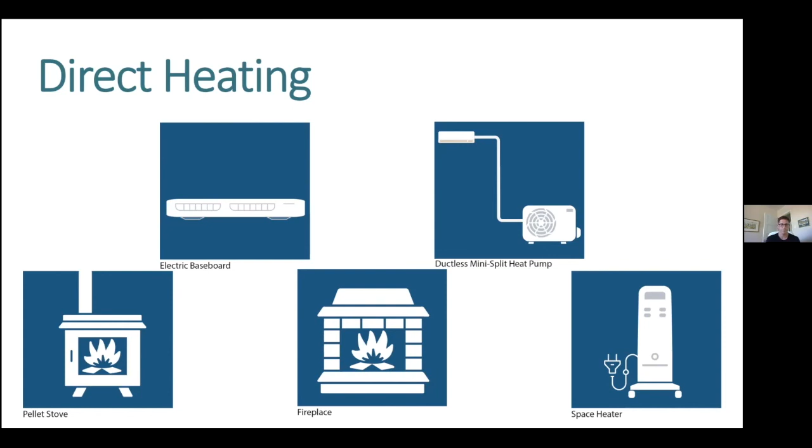And then fireplaces, similar, and gas-fired space heaters, a little more uncommon, a space heater that burns propane or natural gas for heat. So I haven't encountered a ton of them, but they are out there. So Richard, I think we wanted to maybe pick your brain here about some of the concerns around wood heating, if that was possible.

Yeah, a lot of information. Good information. And my experience with wood burning appliances is not good, simply because the temperature is too erratic for internal purposes, and the minus is I noticed that it causes a lot of fires to homes, so a lot of damages to the home that affects the indoor air quality of a person.

And I find that the habits of human beings, that they store the wood inside the homes, causes a lot of moisture damage. It kind of wicks up into the home, and a lot of it creates a lot of carbon monoxide flow that people get affected by, but they don't really know that they're getting affected by it.

So for us, we minimize the use of that, and we designed a heating system with a forced air system and a heat pump, which we find most suitable for our region. The other thing about wood burning appliance installation is if it's not done properly, it causes more damage from the off-gassing of creosote, and placement too close to combustibles will cause something called pyrolysis, which is internal combustion of wood, which will start fires.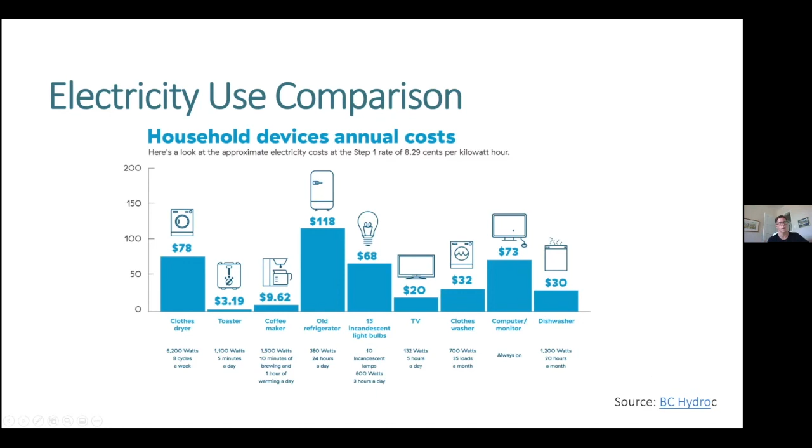Incandescent bulbs, your computer, so doing things like setting a sleep schedule can help, and then your dishwasher. So if you can extend the amount of time that you use between loads, that can also help. Same with clothes washers. So this is another chart just to show you the blue is sort of an energy efficient Energy Star model, and then the green as well as the blue, so the total would be the 2010 model. So it's just showing the relative impact of improving these areas.

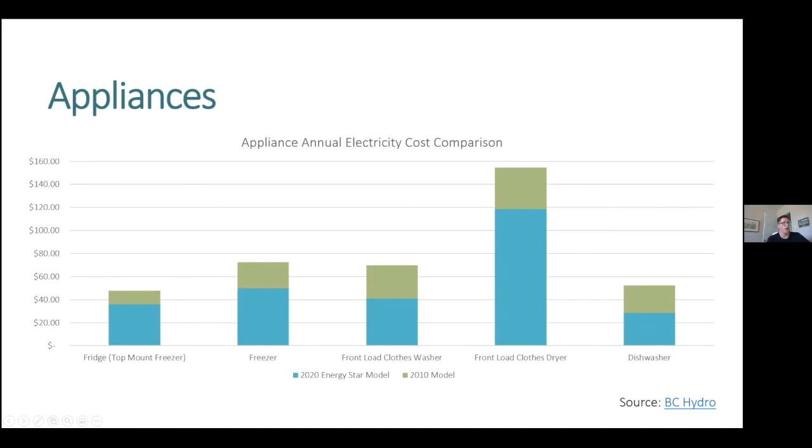Getting into lights, LED, we've heard lots about halogens, CFLs, and incandescents. Incandescents are the kind of old school, mostly gone. They light using resistance, and they're very inefficient, but have a very nice color quality. Halogens would be the next best color quality, more efficient than the incandescent, but have issues with heat. They give off a lot of heat. Same with incandescents, but you can touch those and pretty quickly feel if they are what we think they are and not LEDs.

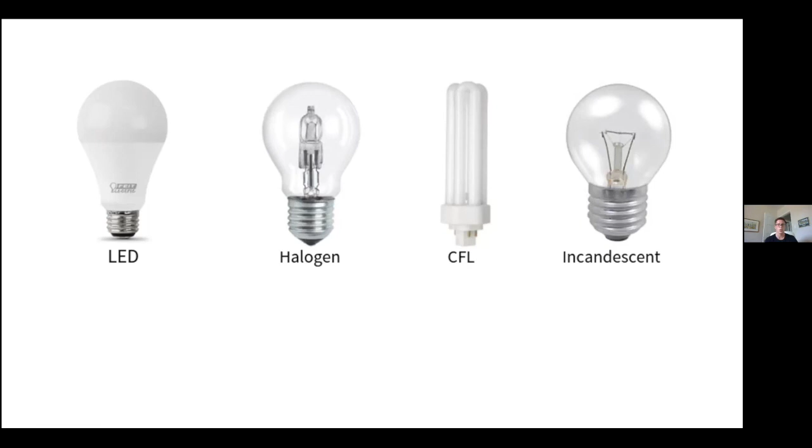And I think now I'm tossing this over to Richard to talk a little bit about electrical, wire, tube, and knob. And I'll manage the PowerPoint, Richard. So if you just want to comment and tell me when you're done on this.

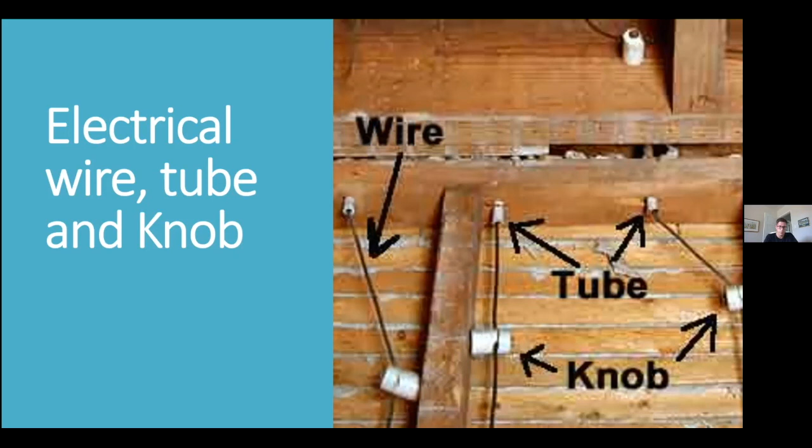Aluminum versus copper. There's two types of wiring that are effective. The most effective is the copper itself, but some places they have that aluminum wiring, which is a combination of copper and aluminum, which is back in the 1960s, and now changed to mostly copper. Copper around 12 gauge. Next slide.

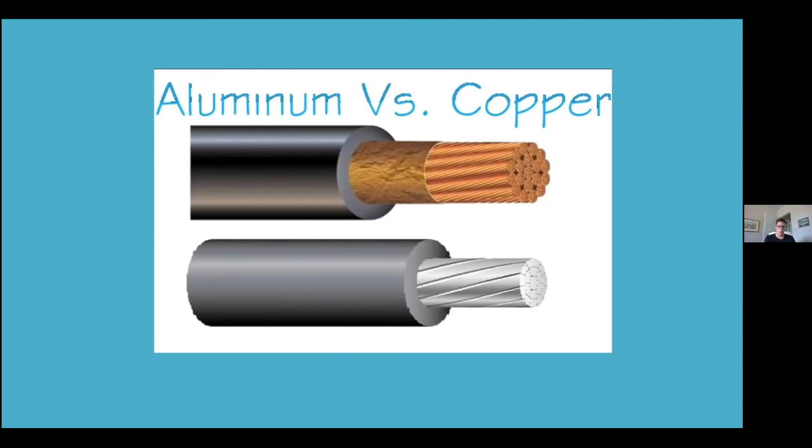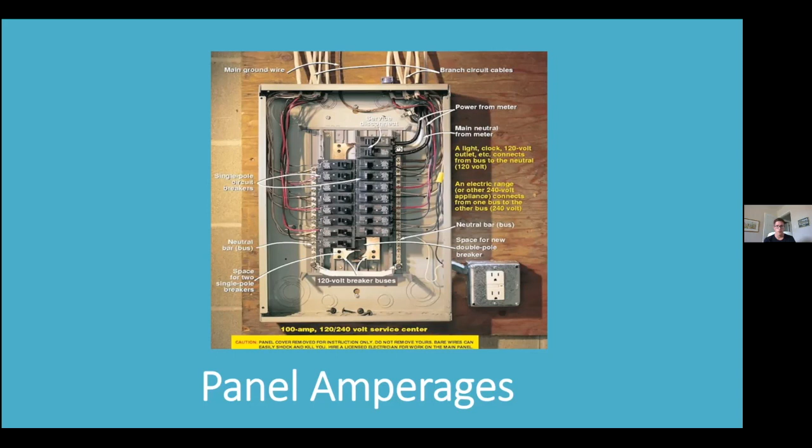Panel amp: the average home has about 100 amps. It's gauged on the appliances that you have in your home, and there's different types of receptacles. One that's most common today is called the Stab-Lok or the Square D. But you'll find older type homes are way underpowered for today's uses, and that's where it becomes costly, and you have problems. Next slide.

Commonly used piping: stainless steel pipe, PEX pipe, copper pipe, PVC, galvanized pipe, brass pipe, and cast iron piping. And these

Oh, sorry, Richard. It sounds like you suddenly got muted. Are you able to unmute? Okay, I don't know where I left off. So

The different types of piping. With copper pipe, we're finding a product called the Wolverine piping. It creates pinholes. So the PVC and PEX pipe are probably the most suitable replacement, but with the galvanized pipe, you'll see it sometimes integrated with PEX. So cast iron piping, and there's another water supply pipe that we don't see here, that stave piping. It's got tar, and that causes problems. Next slide.

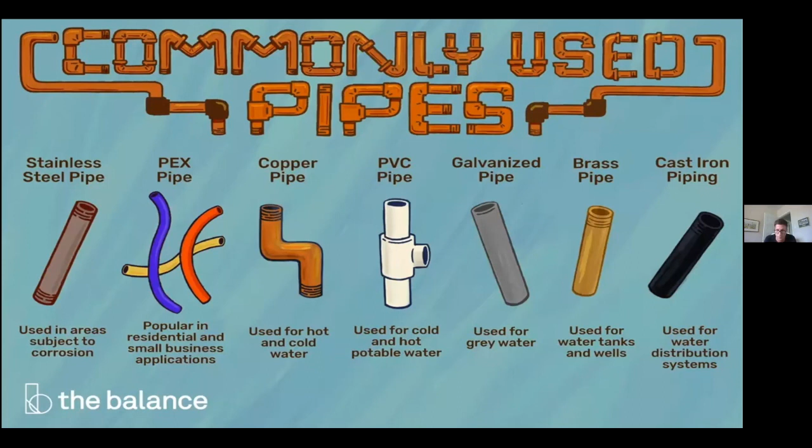Sorry, Richard. So Tom, was Richard going to cover the building inspections, appraisals, and hazards? Correct. Yes. So Richard, I'm just going to take you to this next slide. So site considerations and infrastructure. Okay. So if you could touch on what some of the site considerations are on those assessments around drainage and sidewalks and fencing, and how they might interact with the house.

Oh yeah. So the building code is a minimum standard criteria. So with site drainage, I would say keep it to 2 to 3%, and use your downspouts into a concrete pad that leads away from the home. Sidewalks, you have to treat them properly to prevent cracking. Make sure they're reinforced strong enough. Next slide.

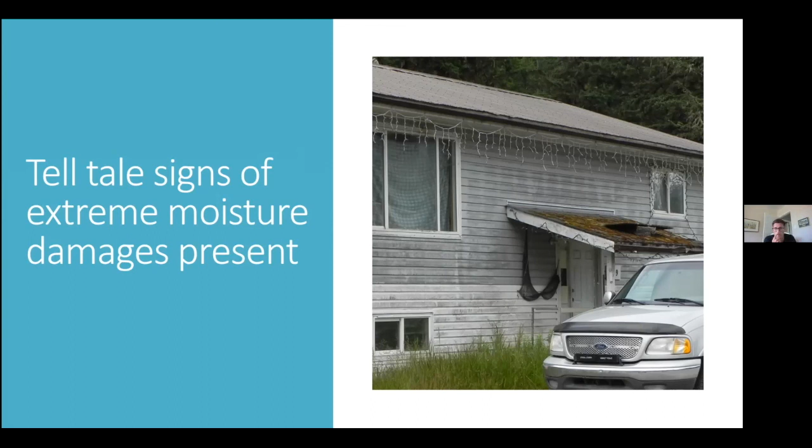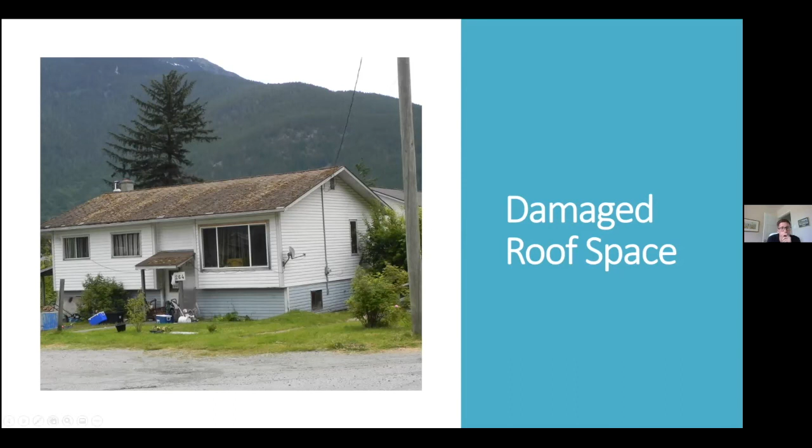Another building, we did a retrofit in here, but you can see the product selected. You see the migration of moisture, the saturation of moisture that we have in the West Coast here. It affects our roof line. So selecting the better product would be key, and proper ventilation to ensure that you have a consistent airflow throughout the building cavity.

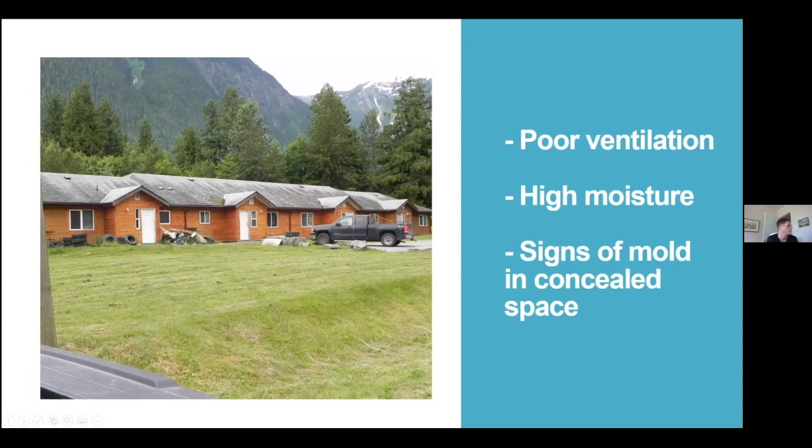Yeah, again, what's so great about this session so far is that questions are being asked, but people are answering them. So that's a great model of what we all want to achieve here, really. We've had some good answers to questions around grey water, some admiration for Richard's work as well.

We have a message in the box from Dre, who asked, what kind of remediation efforts have people made in regards to moss on roofs? Yeah, he knows if it's done improperly, it can lead to obviously larger issues like that example which was given just earlier.

And Leah's also provided some guidance and some recommendations as well. One thing that we're definitely going to do is capture all these links, this information, in one space, and add them all to a spreadsheet so everyone's able to access them. But yeah, Richard's sort of replied to your answer, Dre, saying that you can create spray and it can dissolve moss growth as well.